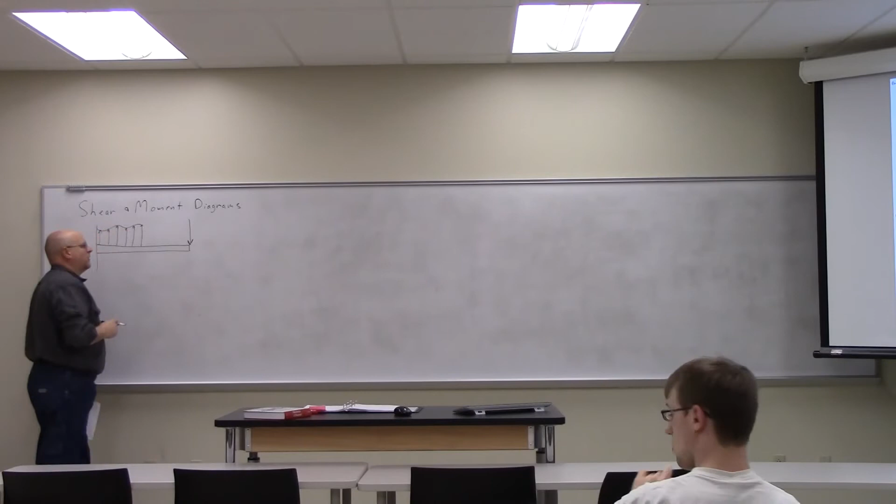If I zoom in on some little piece, some little element of the beam, which has a width of delta x, and this is going to get kind of ugly, this little picture here, so I apologize to those of you watching on video. There's some kind of...

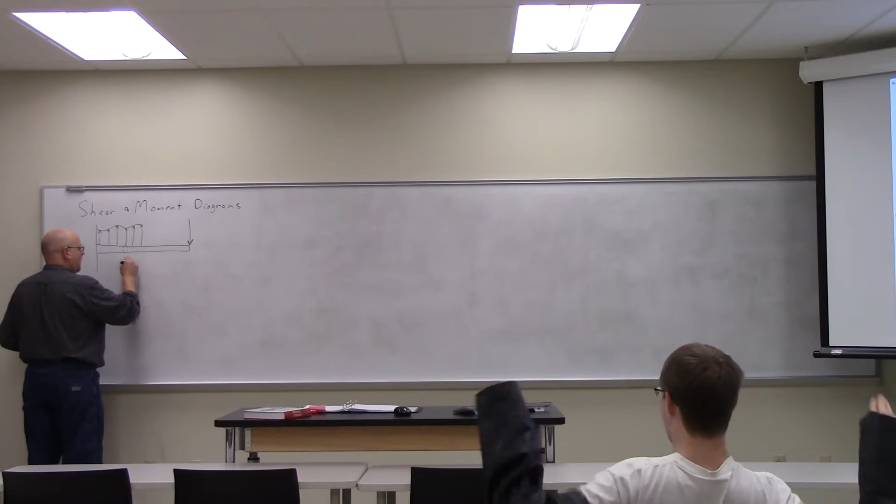A load being applied there at the top. And the magnitude of that force is W of x times delta x, or W bar of x actually times delta x. W bar is the average of W of x over that width delta x. All right, so W of x, remember, has units of force per unit length. It's a force density, a linear force density. So W of x, force per unit length, times the unit length gives us total force.

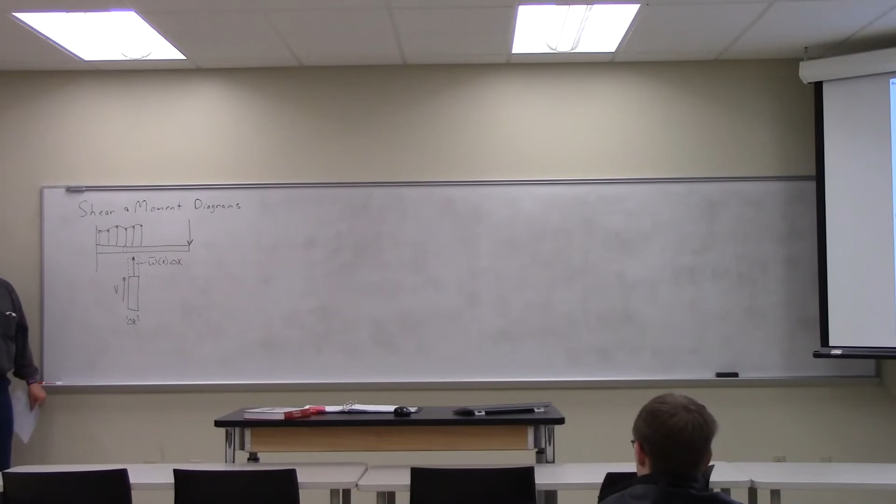That same piece will experience a shear force on this side, and then there will be a shear force on this side that is slightly more than the piece on the other side. Whatever the shear force is, the one on this side is going to be a little bit bigger because the sum of the forces has to equal 0.

Is this all at least familiar from before, okay? So make sure we're reviewing stuff as opposed to teaching stuff. Similarly...

There's going to be a moment on this side, M. Should draw these with vectors. And then there's a moment on this side, M plus delta M, because there's an incremental increase in the moment as we cross from left to right due to the presence of this distributed force.

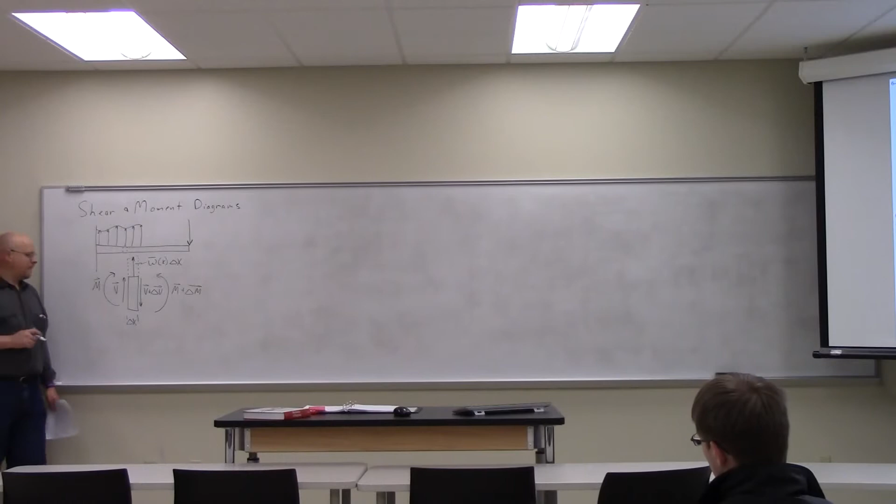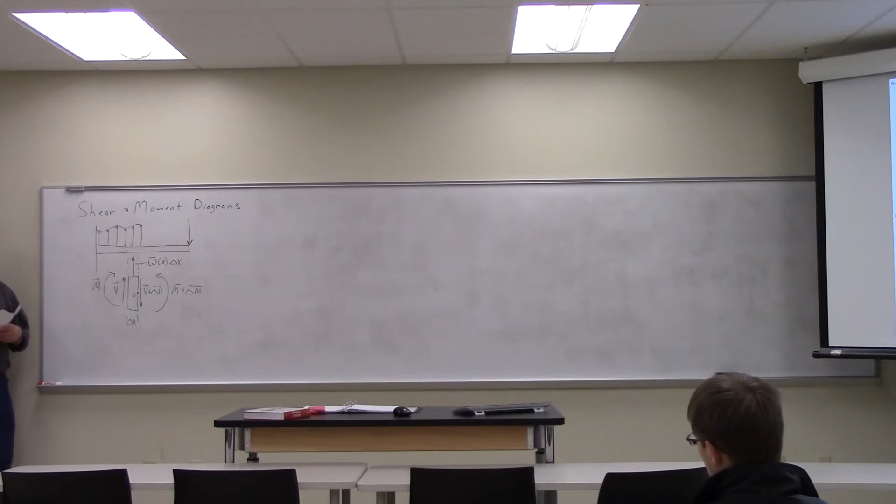Okay, and for the time being, we're going to pick a point O for our analysis, about which we'll be calculating the moments. We pick any point, but we're going to pick that point because the math is more straightforward.

Okay, so what is delta V? Well, I do sum of the forces, in this case in the y direction. So what are all the forces acting on there? Sum of the forces.

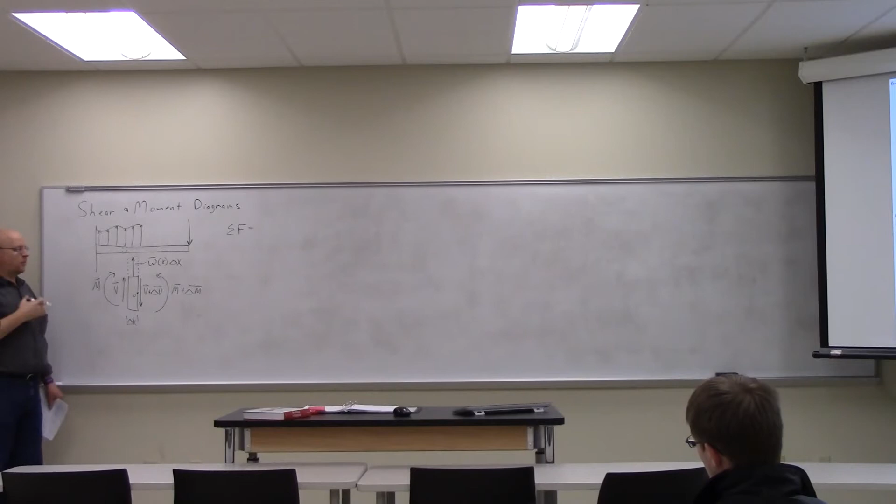V minus V. Well, then we have the V going the other direction. Yeah, it's not V going the other direction. Oh, V plus delta V. Right, minus V plus delta V.

Is that all the forces? Minus W(x) times delta x. Minus? Plus—oh, those arrows are going up. Plus W bar of x delta x. And as we assume that the beam is stationary, those have to add to 0. The V and the minus V cancel out, so I'm left with delta V equals W bar of x times delta x.

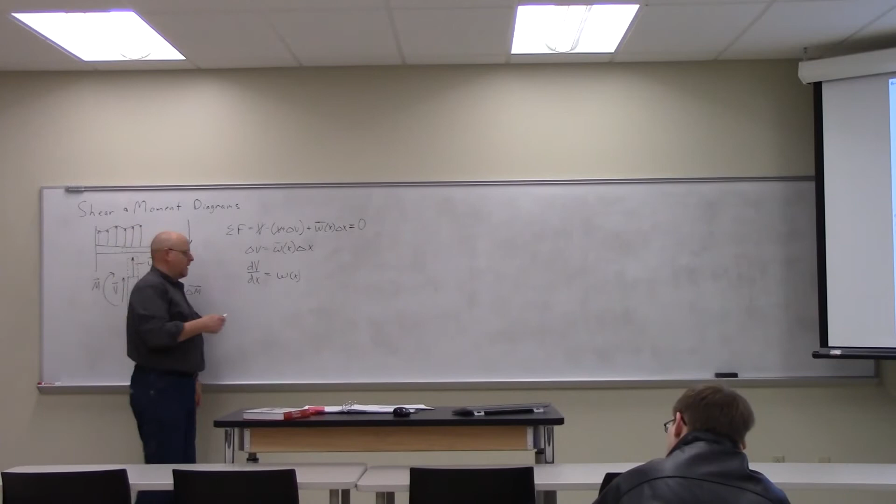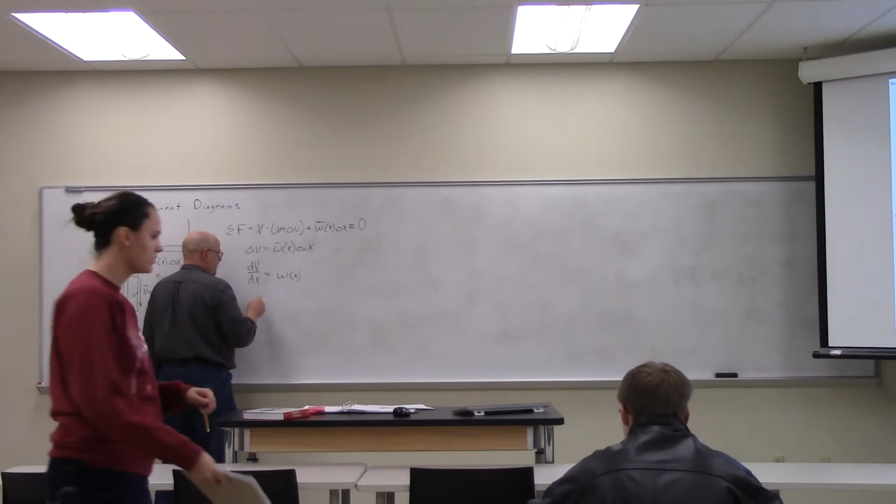And similarly then I get... okay, so I get the change. If I then take any particular length of the bar, any non-infinitesimal length, then the change in the shear along that length is W of X dx integrated.

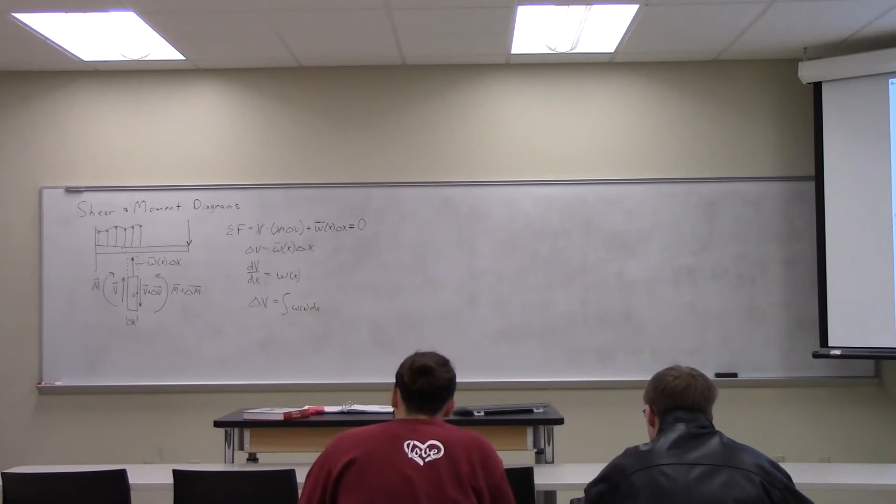So somehow you should be able to remember this piece, that there was an integral. We integrate this function to get our shear.

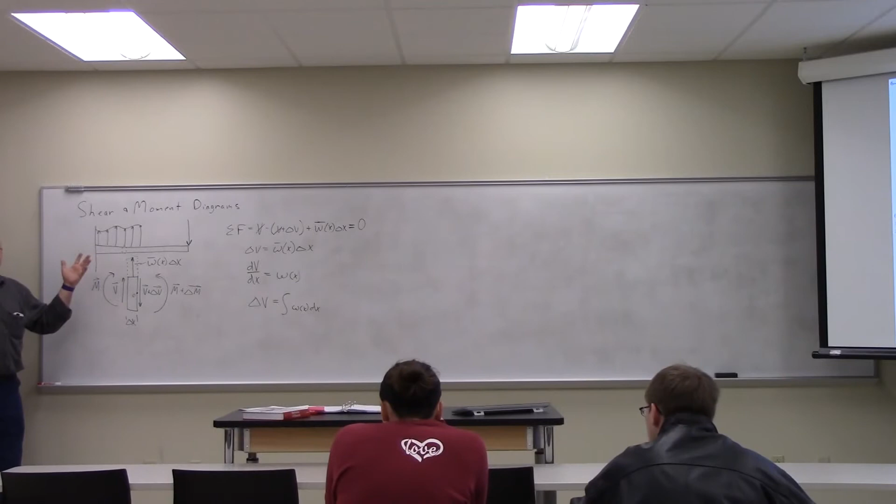Okay? That makes sense? Everybody remembers that? It all sort of, everybody nods. Do you really remember this stuff? So, you want me to nod? Just a little bit? So still worth going through? Yes, yes. Okay, yeah. I don't want to be boring. No, it's definitely. Okay, alright.

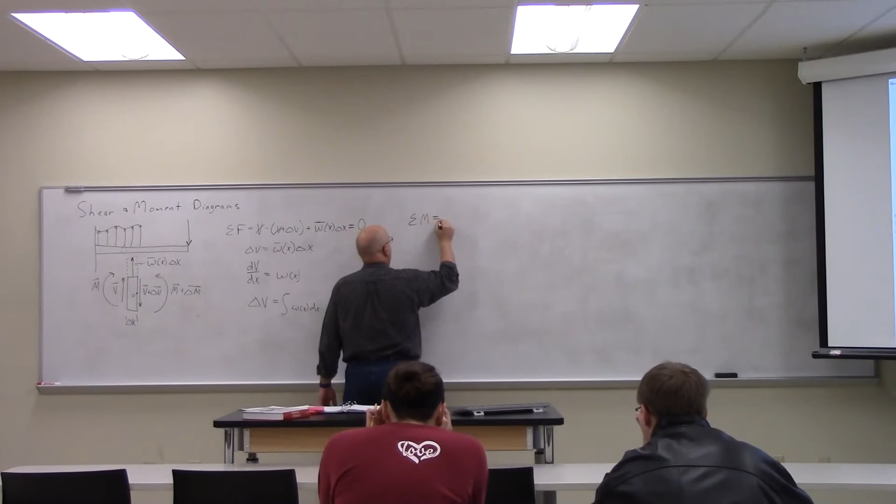So then we do the same thing with sum of the moments. And again, we're going to do sum of the moments about O. So what are the moments that exist? What forces exert a moment about O?

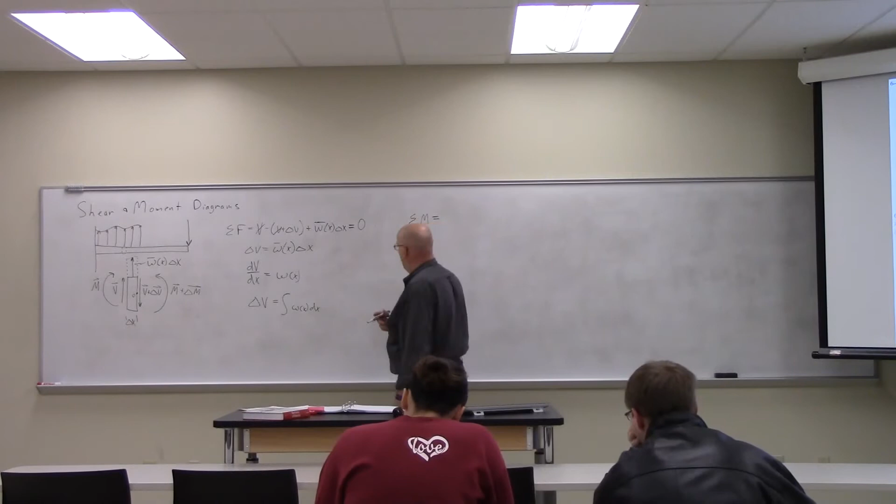The left side shear. So we have V times the distance, delta X. V times delta X. Is that positive or negative? Positive. Negative. Okay, so we'll talk about sign convention in a minute, but it turns out that is positive.

Okay, but we'll talk about the sign convention for moments in a minute. That's one. What's the next one? What else exerts a moment? Is that it? We have no more moments?

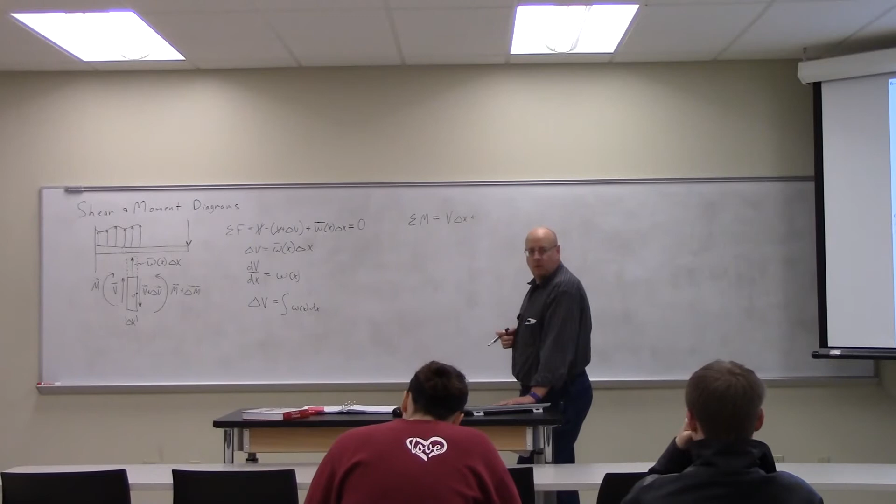There's no distance, well, I guess the load on top is going to exert one. The load on top. Yeah, W of X, okay.

So we have W bar of X, delta X is the force. What's the distance? X, or... we have to integrate it to find it, yeah, we'd have to find the centroid of that area. But that centroid is some fraction, this dimension in here, is some fraction of delta X. K is a number between 0 and 1, some fraction, we don't care what it is, so times K delta X.

Okay, that's 2 moments. And the third one wouldn't act on it because there's no dx, right? It wouldn't have an effect on it, 'cause it's not like a distance away. I'm not sure what you mean.

I don't know what I mean. He's talking about the V. Oh, the V, right plus side. Delta V, right, so V plus delta V does not create a couple, is not a moment about it. You would add the 2 moments up. Right, but you would still add the internal moments, M and M plus delta M.

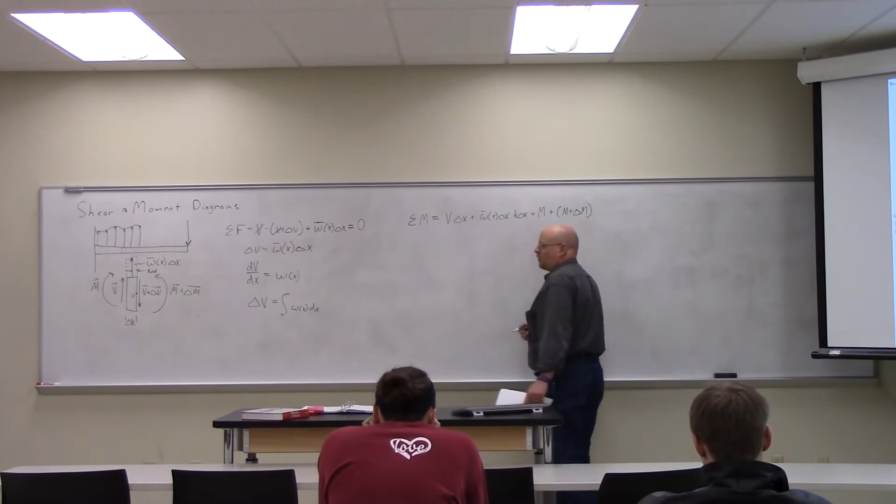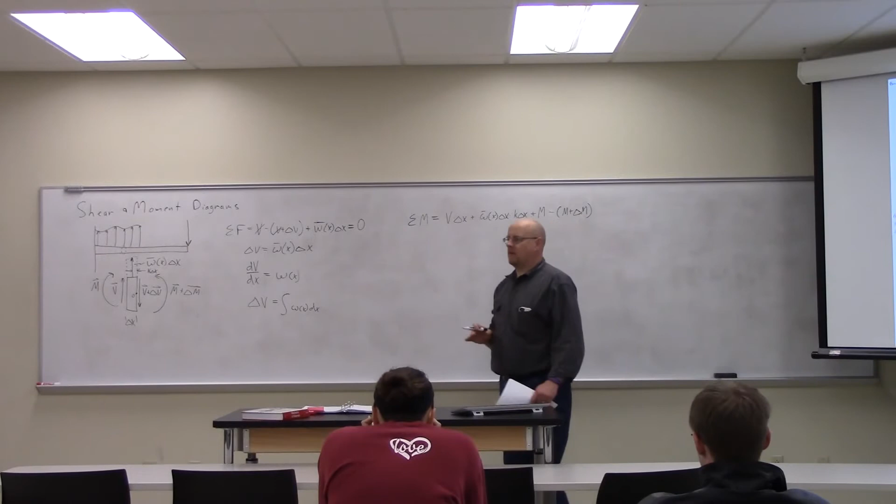Okay, is that correct? No, what's not correct? There should be a minus sign on the M plus delta M. Okay, so the M plus delta M should be minus. It's going the opposite direction, okay? Right, these are all causing it to turn that way, the M plus delta M is going the other direction.

Okay, so we solve that out and we end up with delta M equal to V delta X plus W bar of X times K times delta X squared. And K is a number between 0 and 1, just some fraction.

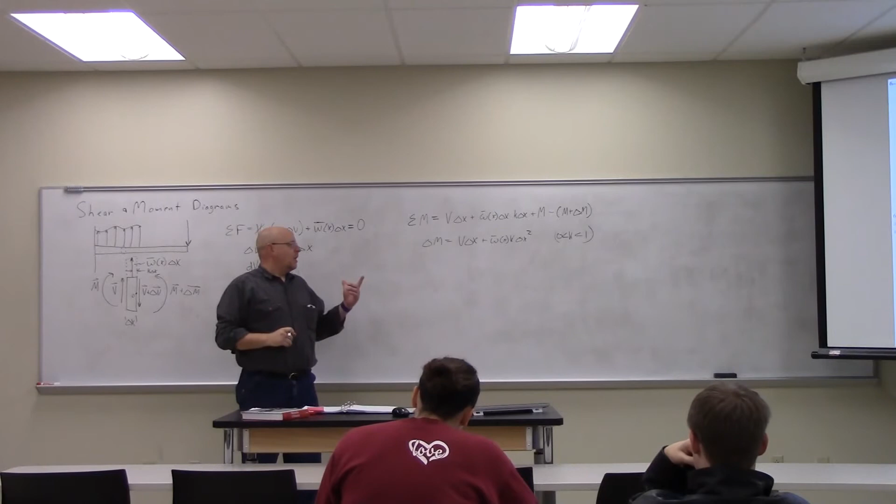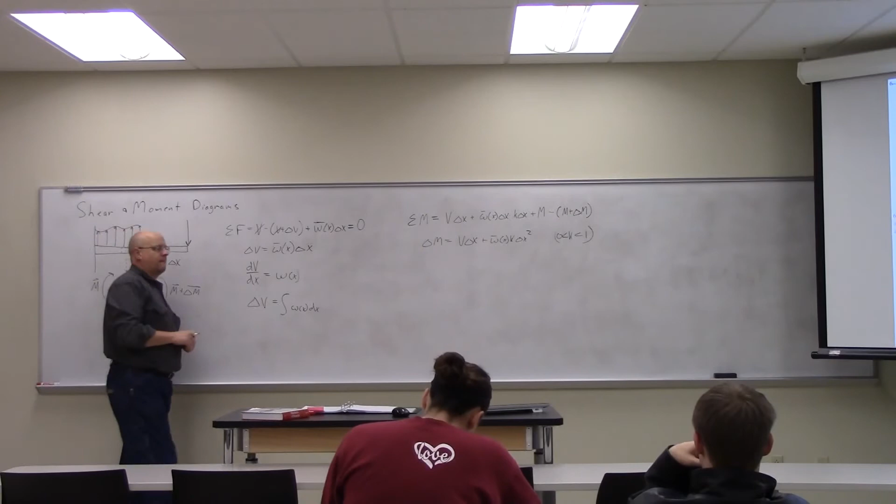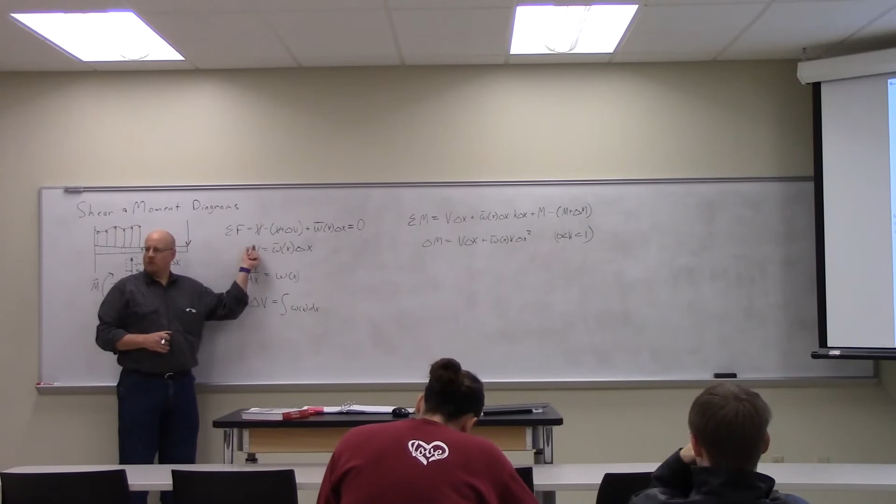As delta X goes to 0, what happens over here? So I allow delta X to get really, really small. What happens to that expression? Look what I did over here. As delta X goes to 0, it becomes dx, and this becomes dv. So as everything goes to 0, this becomes dm equals V dx plus omega bar of x k dx squared.

Well, that's a little weird, right? It's not really the second derivative, that's not a d squared x, that's a dx squared. In fact, that term actually goes to 0, because dx is a really small number. Then dx squared is going to be an incredibly small number.

So in the limit, as delta x goes to 0, I divide this through by delta x, and I get that. Here I've got dm and dx are both small values, so I can keep this one, but that dx goes to 0 because it's too small. So, you remember that from calculus, right? You have a double dx, gets wiped out.

Anyway, if I integrate it, represent it in integral form along some length of the bar, delta m is going to be the integral of v dx along that particular length. So, this change in shear as I move along the length is the integral of the load curve. The change in the moment as I move along is the integral of that curve, which is the integral of this one. So the moment is the second integral of this function, effectively.

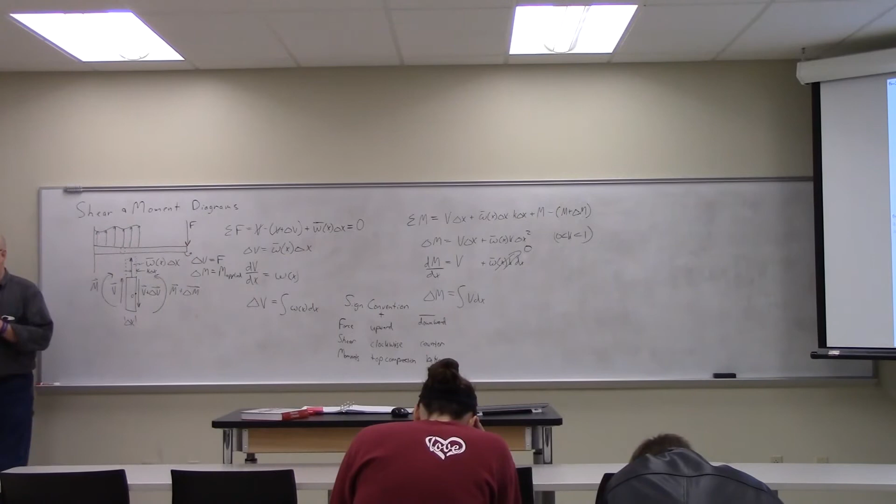And for moments, it's a little different. You would think this moment is also clockwise or counterclockwise, but it turns out the real defining characteristic of the moment is whether it creates compression on the top of the beam or the bottom. If it creates compression on the top of the beam, it's considered a positive moment. Or the other way to look at it: if it's a moment causing the beam to cup upward as if it would hold water, any moment that causes that is considered a positive moment. It takes the beam and causes it to go like this. So you see both of these two cause this beam to come up in that context.

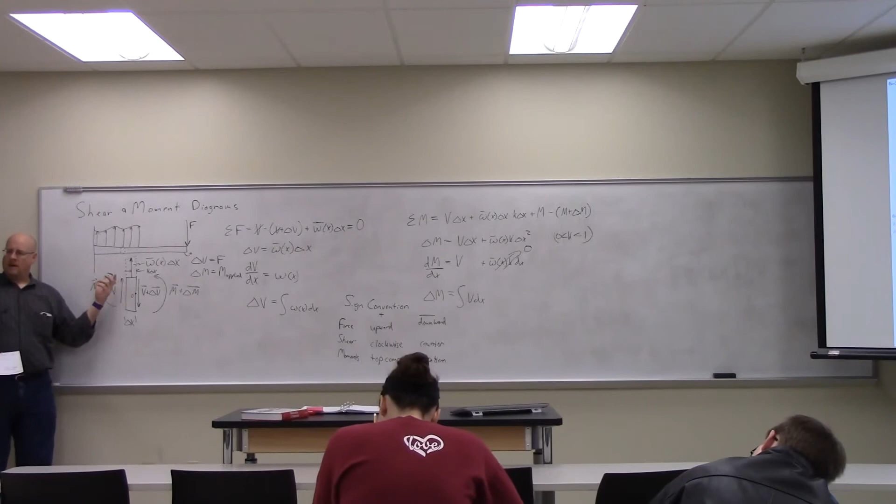They both do? In other words, if this was applied at the left end of the beam, and this was applied at the right end of the beam, you see what I'm saying? So according to this, they're both positive?

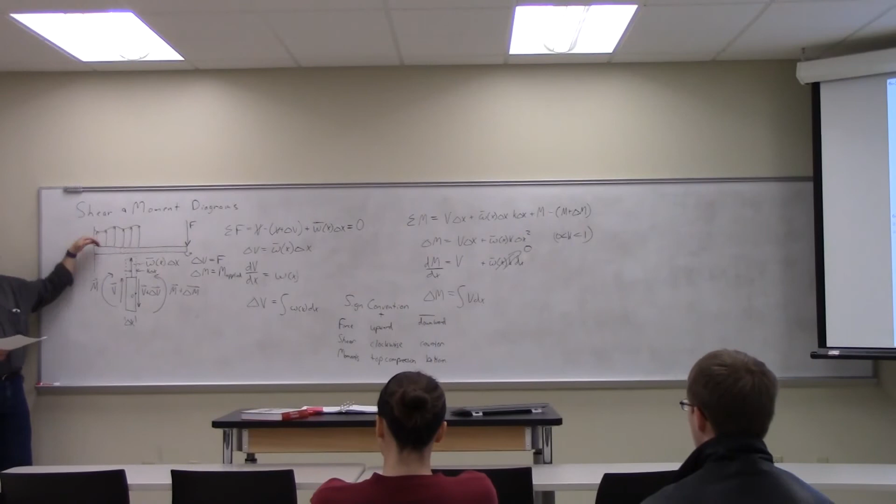This is different, this is the moment, this is an internal moment. What I'm saying is if I applied a moment up here and twisted this way, and then applied a moment down here and twisted it this way, even though the rotation of those two moments are opposite in an absolute sense, they're both causing it to cup in this direction. They're both compressing the top, and so they're both considered positively applied moments.

So the internal ones don't follow those rules though? Because if I'm applying a positive moment here, in order to compensate for that, there's an internal moment that cups it the other way, right? But that still is all one big moment to cup it this way.

When you look at the little piece that you drew, those are all positive. So, no, not really. It's kind of a wonky convention.

It's Hibbeler's sign convention. My sign convention is to use the right-hand rule, because that comes from physics. Any moment that's positive is this moment, any moment that's negative is this moment, okay? In Hibbeler's context, it's all about whether it creates a positive curvature or a negative curvature.

So I honestly don't know how to... it doesn't really matter, you just have to be consistent. It doesn't make sense to me to do it that way, because I'm so ingrained to the vector notation of moments. The only thing with homework is you might have a negative instead. And on an exam, as long as you're consistent, that's fine.

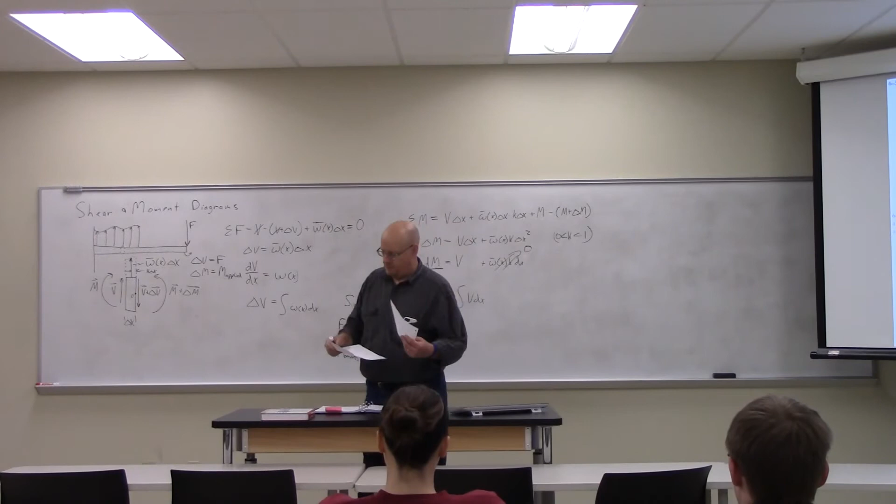I don't, like I said, that's not my sign convention. My preference is to use vector notation. But you need to be aware of how he's laying things out. In fact, you can see, as we did this, one was positive and one was negative. That's how we arrived at where we are. So yeah, I'm not sure where he's going with that.

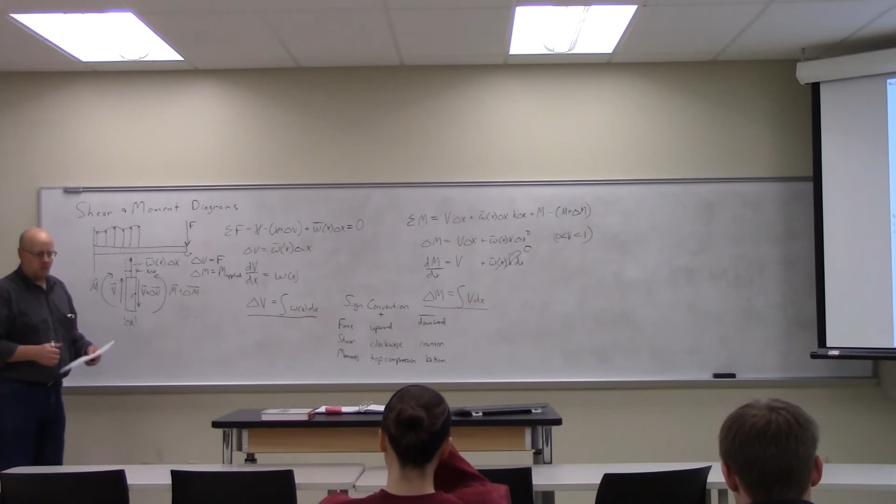Any other questions about that? Again, most of this should be stuff you're familiar with from last year. We're reviewing where it came from, but what we really care about is actually arriving at the expressions for V and M. Any questions before we move on to some problems?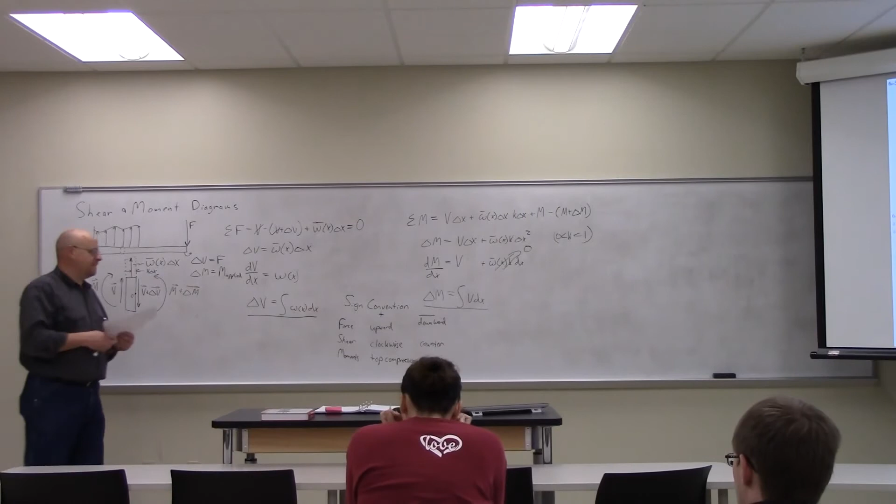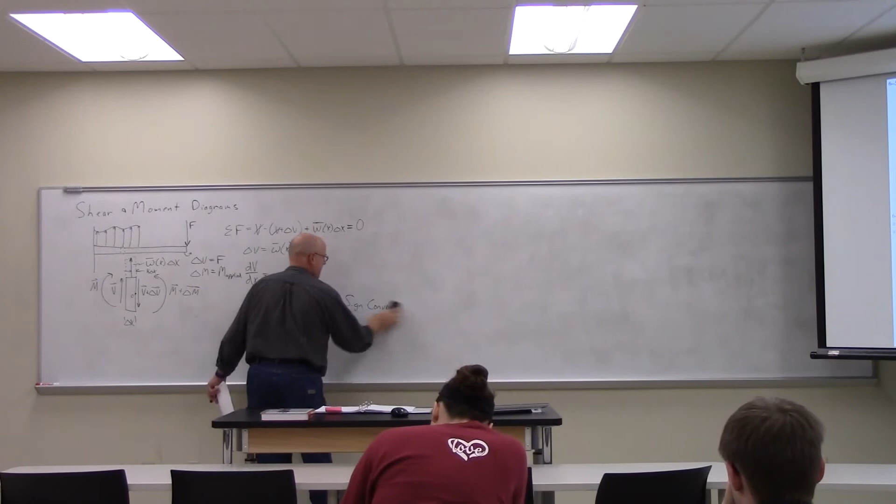Okay, let us move on to problem 6.5, a nice easy softball to start with. Can I erase, Tom? Yes.

So for 6.5, it's just asking us to derive the shear and moment diagrams for this beam. So we have the beam as a function of x. I'll put some marks in here at 2 meters and another one at 5 meters, because those are the two distinct points in the diagram.

Okay, and now what do we do? Where do we start? Probably a free body diagram. Isn't it free body? I was debating, I just wasn't sure. Okay, free body diagram of the bar. What do we got? What am I going to draw?

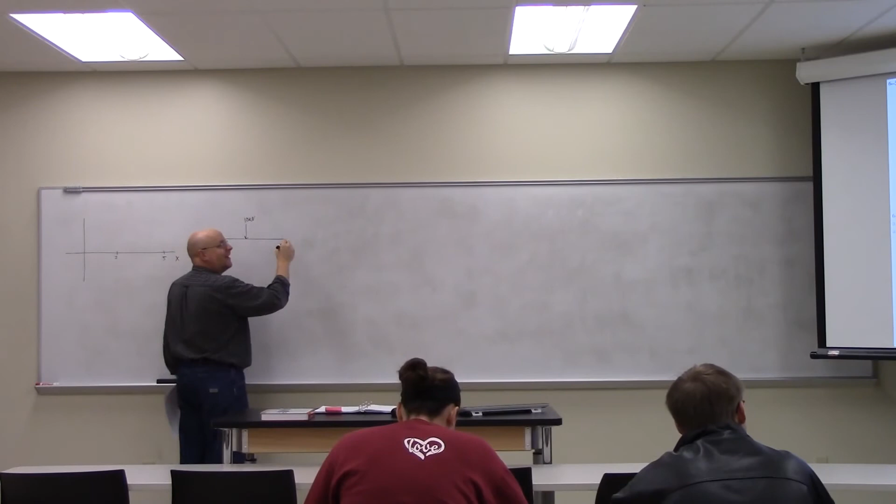Forces in the moment. Two forces in a moment, okay? I've got a 10 kilonewton force. I've got an 8 kilonewton force. And apparently there's some kind of a moment applied out here, 15 kilonewton meters. Anything else?

Probably a reaction force from the wall. What's it going to be? 18, yeah, kilonewtons. It's going to be 18 kilonewtons. Don't even have to sum the forces to recognize that, right? No statics involved, really, just pretty straightforward.

18 kilonewtons. That it? It's also gonna be a reaction moment, of 75 kilonewton meters.

Okay, now we have the free body diagram. So let us begin. Oh, I should draw two of these. Right? I need the V curve and the M curve. And here's 2, and here's 5. All right. Let's do the top one first.

What's V going to look like? Up to 18? Like from the beginning go up to 18? Makes sense. Like that? Okay, where do I go from there?

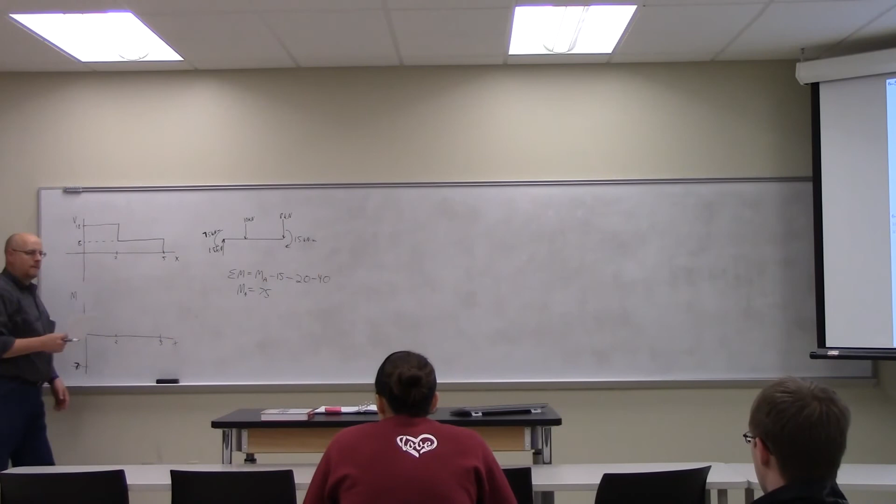I just wanted... because the top is in tension, the bottom is in compression, we list that as negative 75, using the Hibbeler convention.

Even though from a right-hand rule standpoint, that applies to them, your convention is different than doing the right hand rule that's pointing towards you, or if you look at other paper, it points up, points down.

But again, Hibbeler convention, top is in tension. So now we have a line from 75 to... mental math, yeah you can do it, I just forgot.

To the area under the curve, which was 36 I think. So you're saying a line from the minus 75 to whatever 75 minus 36 is. 39. That's what I'm saying, that's what you're saying.

Okay, then what? And then another line, from negative 39 to negative... oh no, yeah, to 40, to positive 1. That's not it. This is where somebody else jumps in.

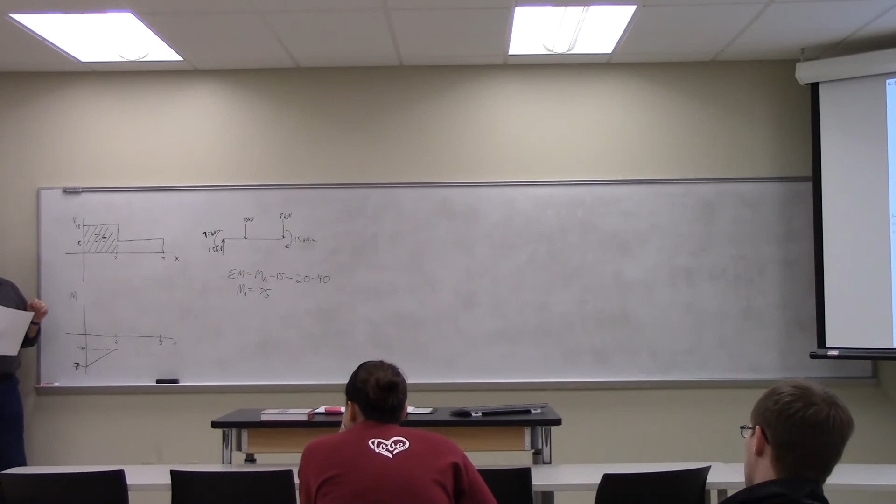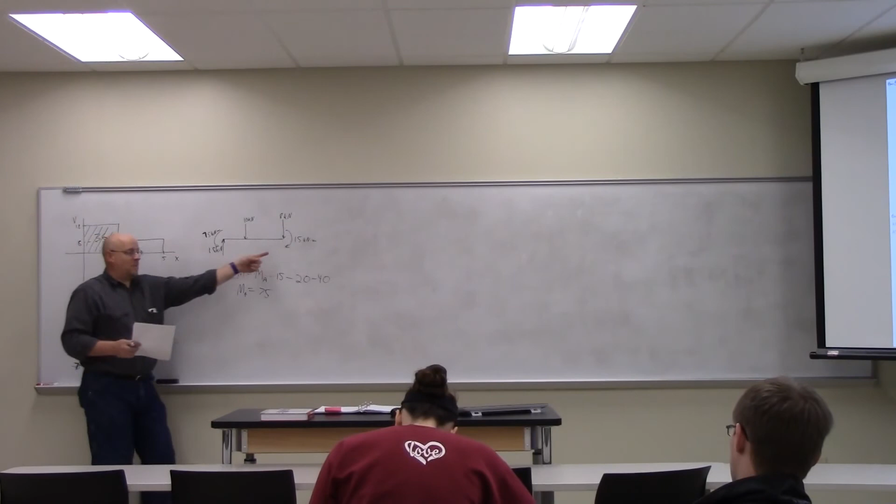Negative 15. What a great guess, Jesse. 15. Right? And then you can typically close it off, but anyway. So that's right, because we got minus 15 down here.

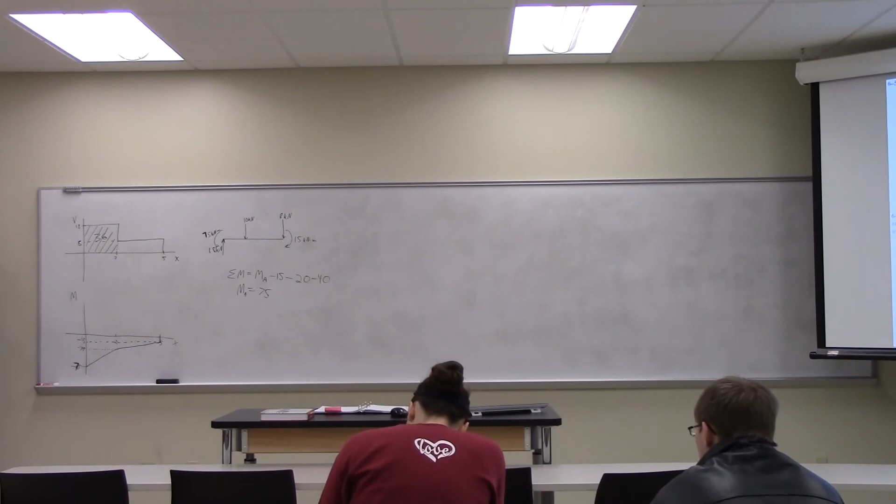Okay, but do you understand why we use that convention now? So the whole beam is always in negative. Okay, so there's our shear and moment diagrams for 6.5, 6-5.

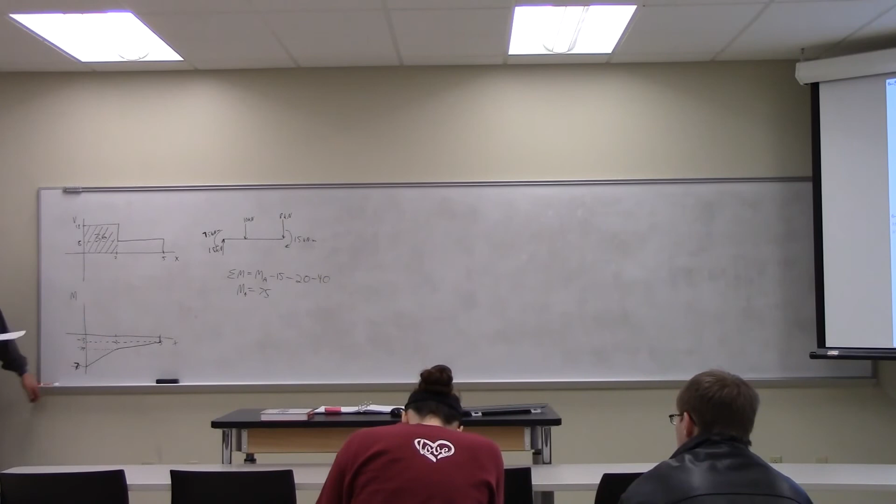Are we ready to tackle the bottom one? Sure. All right, let's do 6.18. Draw the shear and moment diagrams for the beam and determine the shear and moment throughout the beam as a function of x. In other words, they want a functional expression of the shear and moment, not just a picture.

Okay, for the shear and moment diagrams, you're basically looking at the transition points, right? That's what you did, you defined it based on the transition points. Here we're going to end up with some kind of functional equation for those lines. Okay, all right, so where are we going to start with 6.18?

Go with free body diagram. All right, cantilevered beam again. Uh, 6 feet, right, it's a little past halfway.

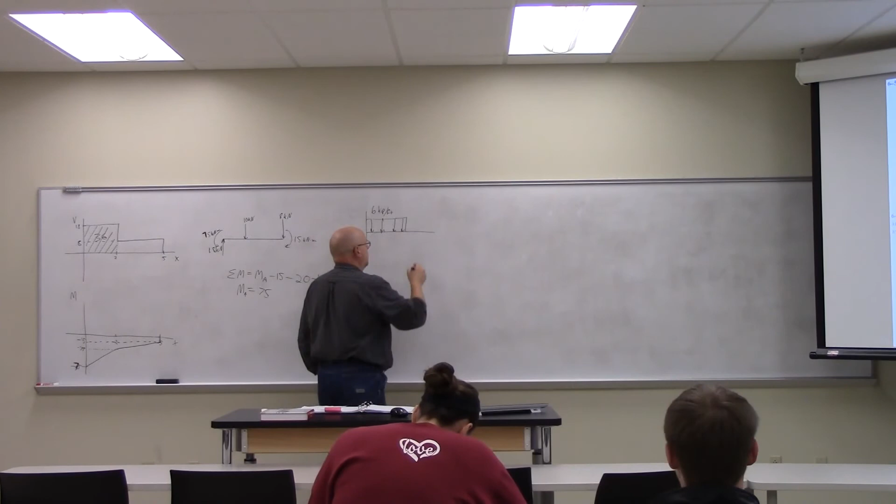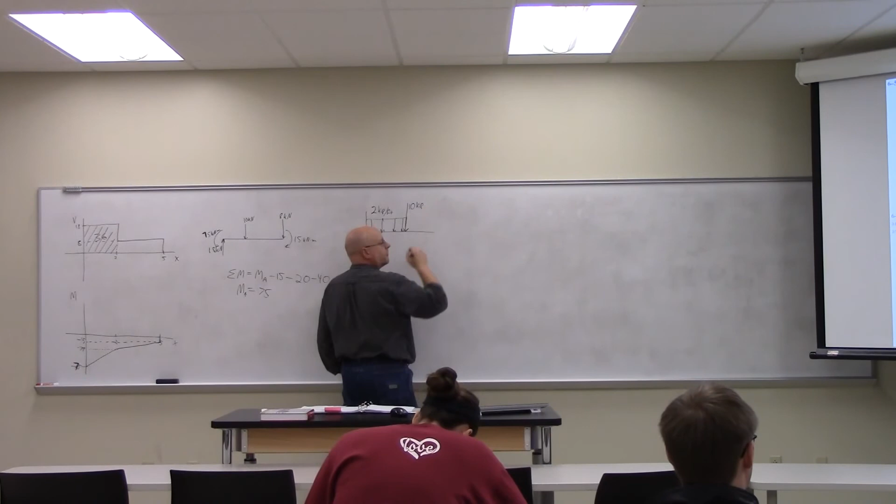So here we have downward forces of 6 kips per foot, and then we have one big... it's two kips per foot, oh 2 kips per foot sorry. We have one big 10 kip force there, and then an 8 kip force out here at the end. And then a 40 kip-foot moment applied at the end.

All right. Let's just do B first, and then we'll draw M. So, is there any other things I need to put in my free body diagram? Or do you want me to change that free body diagram at all? We have a reacting moment and a reacting force.

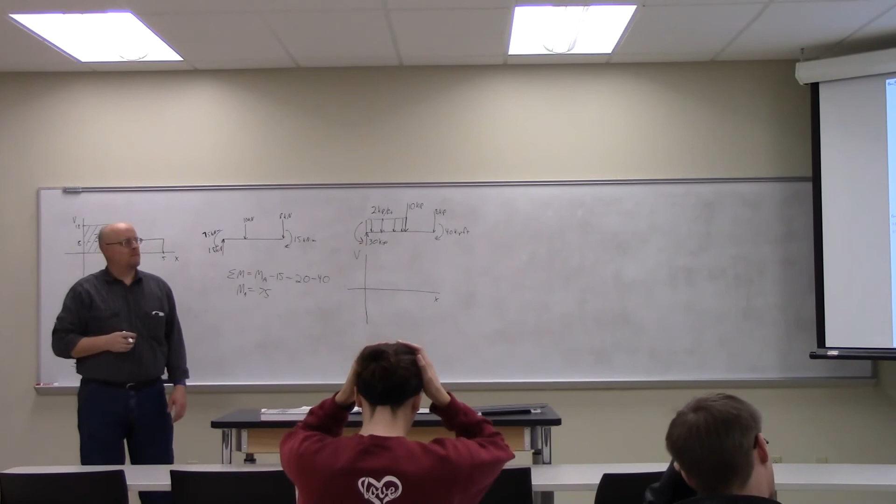Okay, what's the reacting force going to be, upward or downward? Upward. And the reacting moment? Down, this way. Okay, what's the reacting force? 30 kips. I guess 2 kips per foot times 6 feet is 12, plus 10 plus 8 is 30.

What is the reacting moment? It's not 40. It is not 40. That's correct.

This is 6 feet. This is 4 feet. So we'll be able to distribute the force, we can just do the center of the force, the centroid of the region.

And then minus 40. So this, for the purposes of determining moments or doing the free body diagram, becomes a single force of 12 kips acting at the center of the square. The centroid of a rectangle is right at the center.

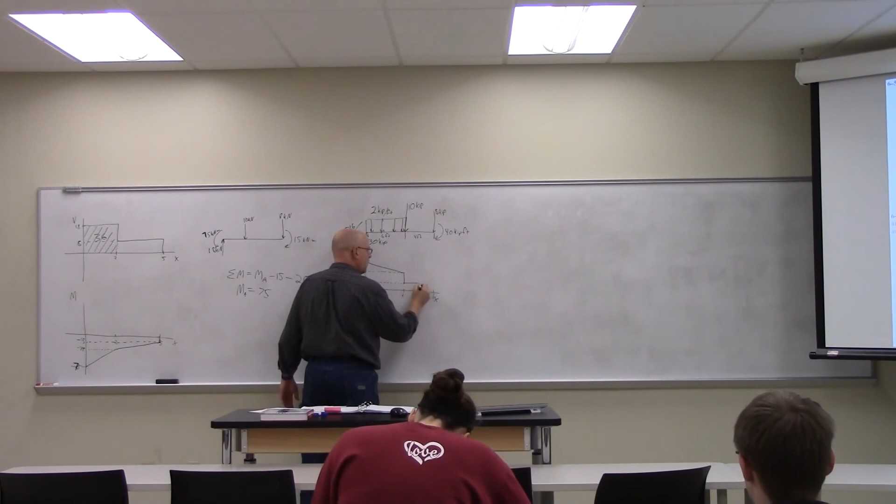Now what do I do from here? Minus 10, so down to 8, straight down, all the way over to 10, straight down to 0, all the way over here, straight down to 0. Everybody okay with that? It's all right.

I've talked to you guys about this because you had me in class last year. The little guy, the Spanish guy, did a hand puppet. Oh yeah, he was on the Muppet Show. Senor Wences. Anyway, actually the guy that said 'it's all right' was the head in the box, not the hand puppet. Sorry, it's a cultural reference, you guys have no culture apparently.

All right, that's V. Everybody's happy with V? All right, then what are we going to do with M?

Let's just move that. Absolutely wrong. Try not to let you get too far ahead of yourselves. If you're going to be wrong, you'd rather be wrong early than late. True.

Negative what? 216. Negative 216. Let me draw my 6 and 10. Okay, what do I do now?

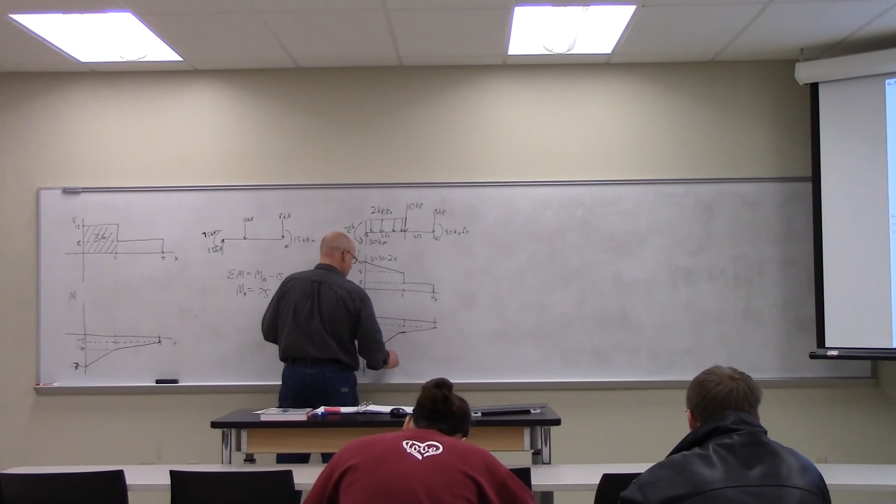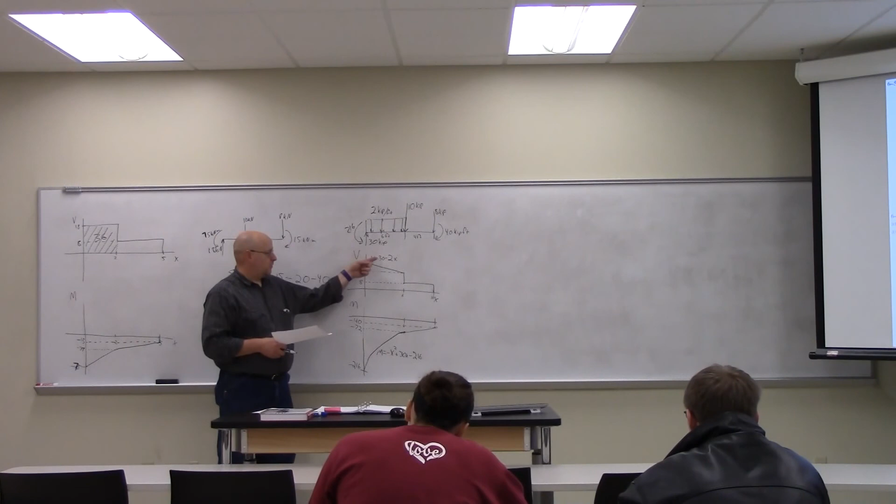Okay, oh yeah, the functional relationship. So in each of these regions I need to have a function, right? So in this region, v equals 30 minus—the slope of this thing is 2x, right? And then up here it's just 8. The function here is the integration of that: m equals negative x squared plus 30x minus 216, because I'm integrating this with an offset of minus 216.

And then here, as I said, v equals 8. I integrate that, I get m equals my starting point of minus 72 plus my—no, that's not right, that's not what they have here. Interesting, oh, minus 120, yeah, because I have to extrapolate it back, right, because x is still defined. So this becomes, instead of minus 72, it becomes minus 120, because that's the actual y-intercept of that line.

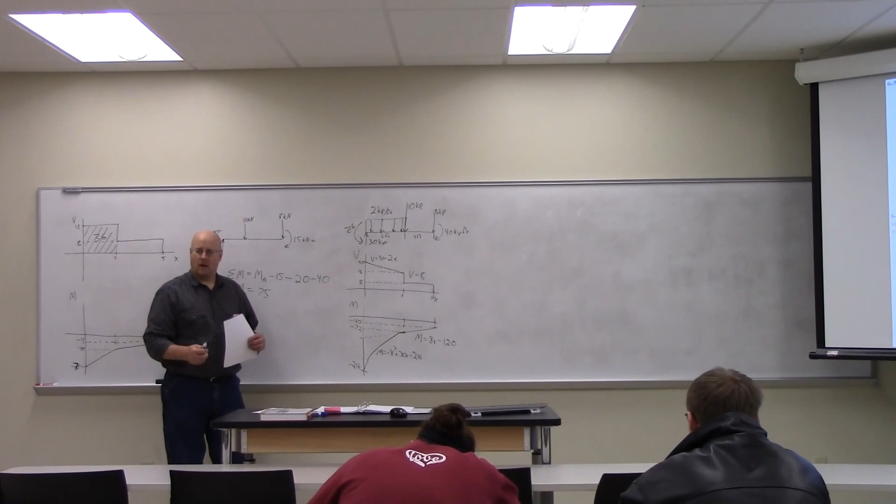Okay? All right, next time we'll do some more problems. We've actually covered all the stuff, but the problems get harder, so.